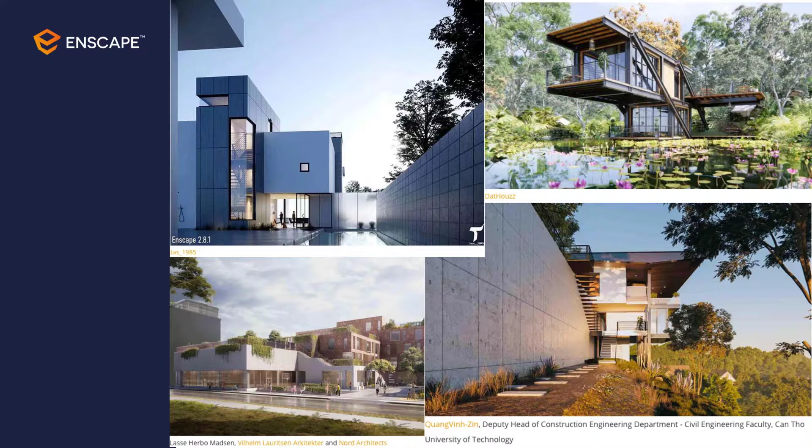In today's process, it's kind of fractured. At some point in a project, we branch design and create a new, separate visualization model that's really disconnected. Then we use this visualization model to answer questions and collect feedback, and we have to manually coordinate what we learn back into our design process. Then, of course, we restart the cycle at the next project milestone. But why?

Why does rendering and visualization have to be separate from design? Why can't it be integrated into our design process?

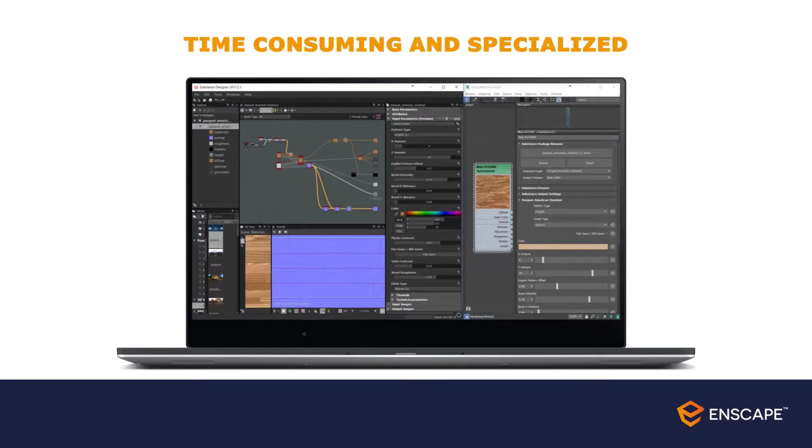Traditionally, rendering technology has just been very difficult. With traditional rendering technology, it can take hours and sometimes even days to get out a high quality visualization. Correctly configuring textures, materials, and lighting to achieve a realistic look is difficult and demands specialized know-how, and even then it can require a lot of trial and error. As a result, in many firms, rendering and visualization is relegated to specialists using specialty visualization software, or in some cases it's completely subbed out.

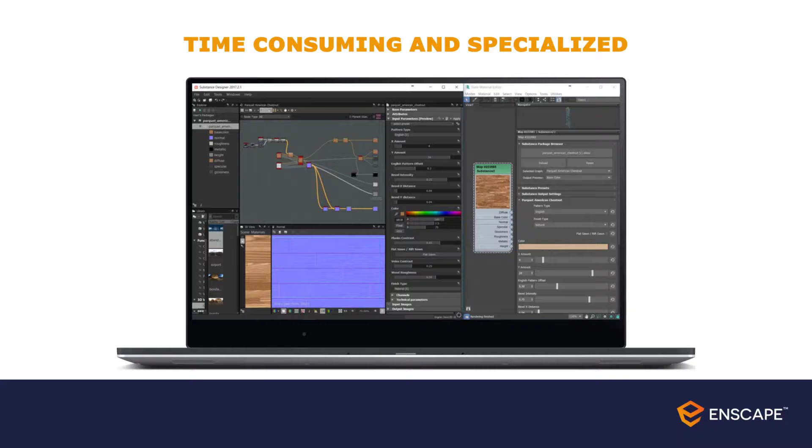Real-time 3D is different. It's this next generation of visualization technology. What we're doing is leveraging new advances in graphics technology and hardware technology. It's fundamentally the same rendering technology that you'll find in today's high-end video games. And while the results are incredibly impressive, more importantly, the results are instant and very easy to achieve.

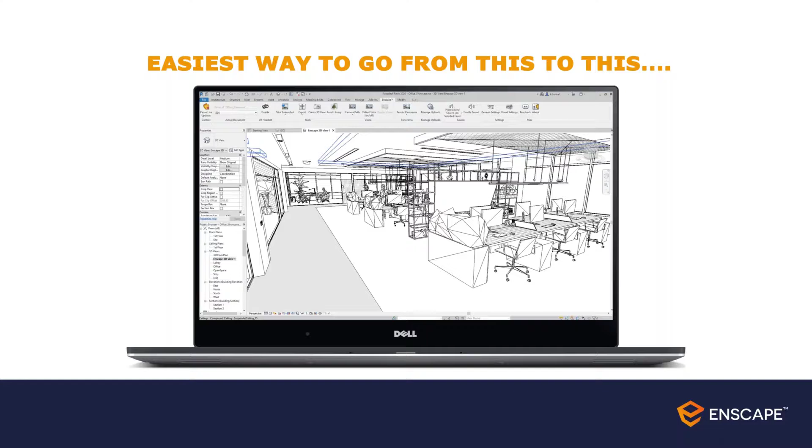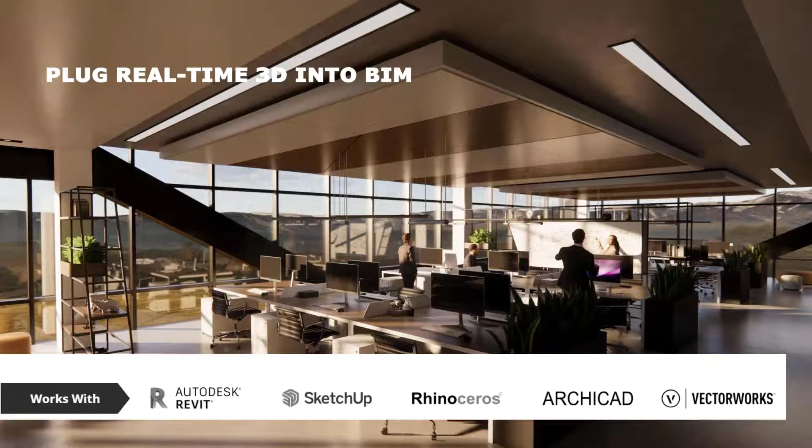It's this kind of speed and simplicity that are the cornerstones to Enscape. Quite simply, Enscape is the easiest way to go from something like this to something like this. For us, this concept of ease of use and speed is not just jargon. These are truths derived from the fact that Enscape is a plugin, not a separate rendering program, as you'll see.

Unlike other rendering programs, you don't have to exchange files or manually sync models. Enscape natively plugs into your favorite modeling program, and it integrates into its interface and into your BIM workflows. In many ways, Enscape is simply just another rendering mode. It's not a standalone program that you need to learn. In fact, if you've ever added a light source or a texture in Revit, you already know how to use Enscape. The results are just a little easier and faster and way more impressive.

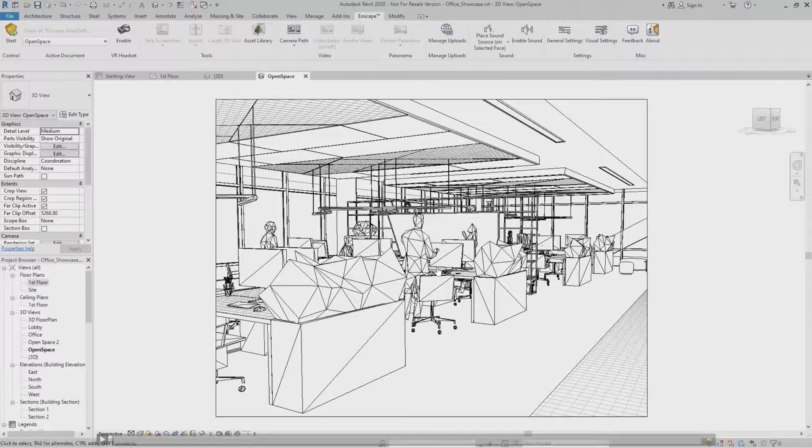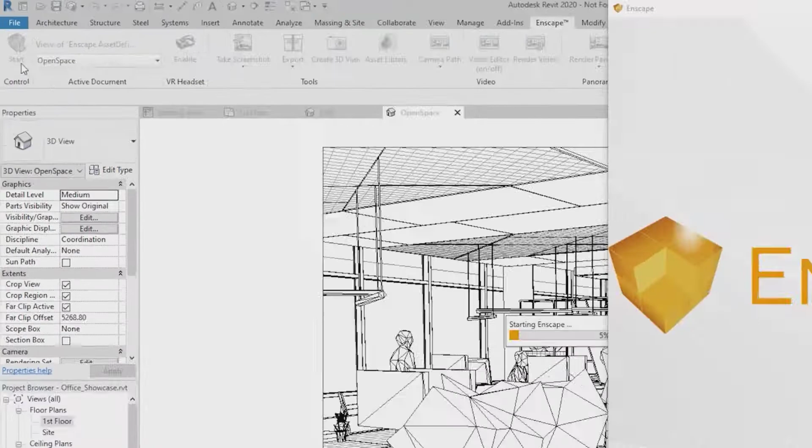The animation's playing a little slowly, but fundamentally what we're looking at here is after you install Enscape, it installs a ribbon in your Revit interface, and it's completely integrated into the Revit workflow. To start Enscape, you simply click the start button, and then Enscape will launch a new window where you can see your models fully rendered.

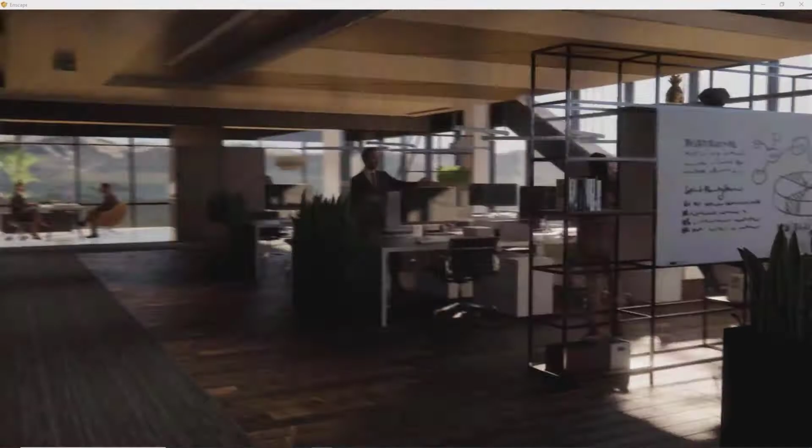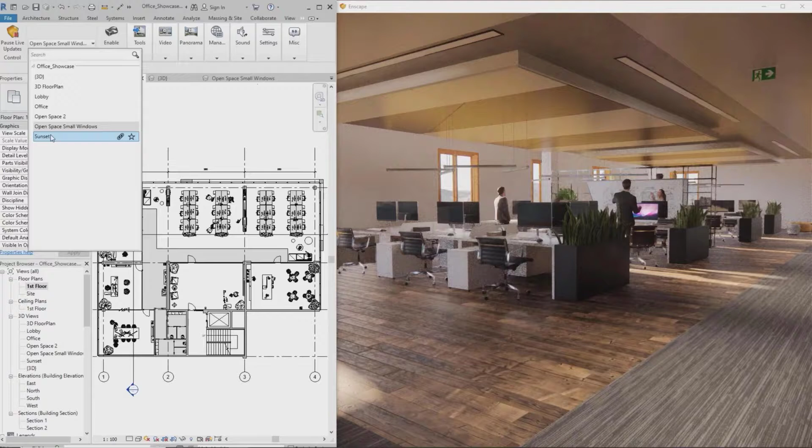Any textures and lights that you've assigned in Revit are automatically picked up in Enscape. Using the W, A, S, and D keys and the mouse, we can begin to immediately explore a project in 3D. To find specific views, you can use your saved 3D views in Enscape to navigate around the model, and your saved views will not only change your view but will also show any visibility settings that you might have saved.

Because Enscape and Revit are integrated, now BIM modeling and visualization can be simultaneous. They don't have to be separate. You don't have to stop design in order to visualize in another software program. Visualization can become part of your Revit workflow, your design workflow. In fact, in many offices, you'll find Revit open on one monitor and Enscape open on the other, allowing the architect to work back and forth between the visualization and the BIM model, and to instantly see how their design decisions will affect a building's architecture and construction, helping them get to decision points faster.

The results are amazing. With Enscape, we can create still renderings in 4K resolution, generate 360 panos, create path animations—and I'll drop a link into the chat with an example of a path animation—and also, with one click, we can take your Revit models and experience them in virtual reality.

So this is sort of a plan of that space, and this is an MRI suite. They had some stuff there, either a real MRI or a mock-up. You can see in the top left we had a full VR station set up, so if somebody wanted to immerse themselves fully in the actual 3D model, they could do that.

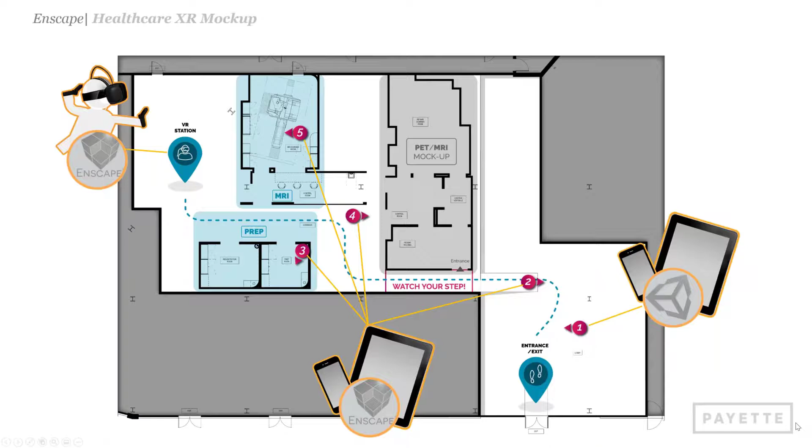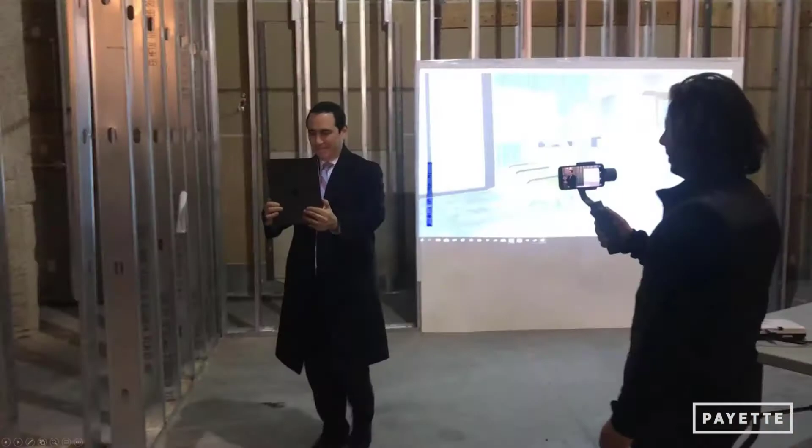The numbers are indicating different QR codes that were spread around the space. If you click to the next slide, you'll see a video showing people using the QR codes with their iPads and phones. This was a wildly successful meeting. The biggest surprise to me was on multiple occasions seeing groups of 2 or 3 people walking around getting excited anytime they'd bump into a QR code and scan it to see what was happening.

What you saw there was the gentleman actually had a live model. I believe we used Unity to create that one, where you just scanned the QR code and it would load the full model into the iPad, and you could walk around the space and see live what the actual rendering would look like. But everything else was Enscape panos, and that's an Enscape VR session.

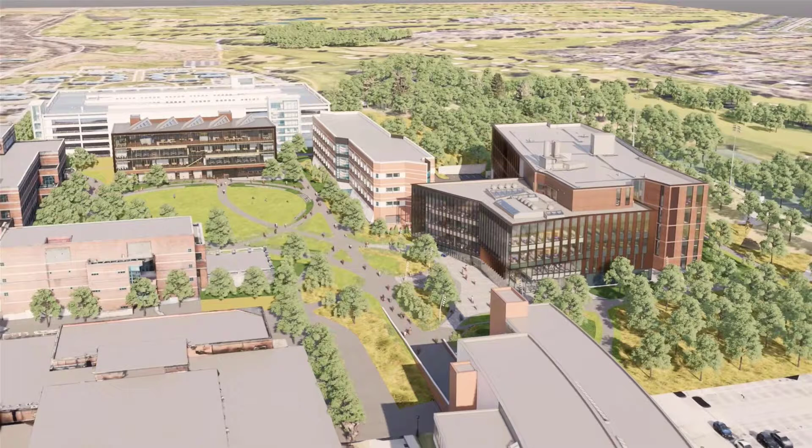This is a project we designed for a large state school, consisting of 2 buildings. I will name them Building 1 and Building 2 because the client wants to keep that information confidential for now. The L-shaped building on the right is Building 1. The rectangular one with triangular skylights facing the central quad is Building 2. The project also includes the redesign of the landscape of the quad in between the buildings.

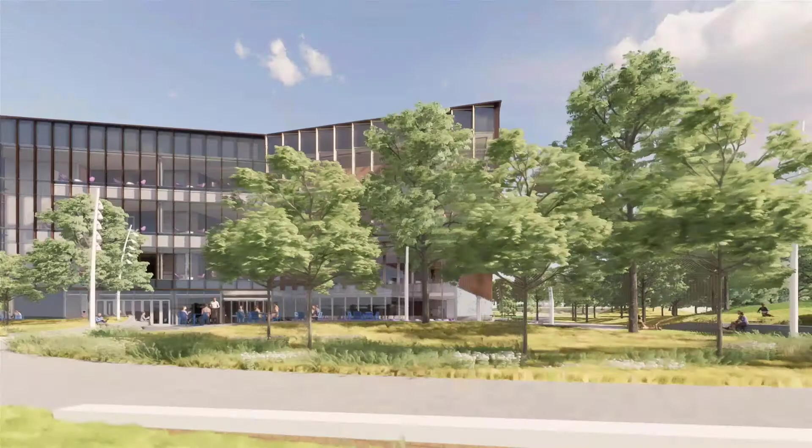I will show short clips trimmed from the original video, like this one, to keep the presentation short. I also had to compress the videos to avoid any technical difficulties during the presentation, so the original video quality is much better than this. Enscape has much better results.

We structured the animation with 3 different primary sequences: the exterior shots of the buildings, and the interior shots of Building 1 and Building 2. You will see some short video clips from each sequence in the following slides.

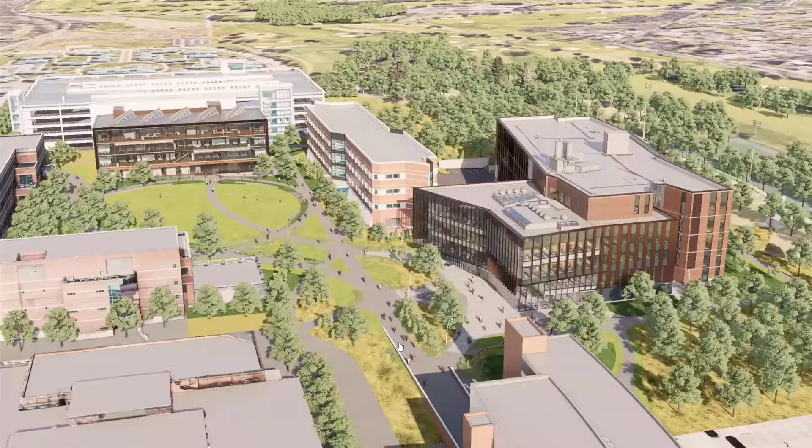As you can see in this slide, our animation starts with an aerial shot composed of our building models, context buildings scanned by a drone and imported as a textured mesh, and Enscape assets like trees and people. Next slide.

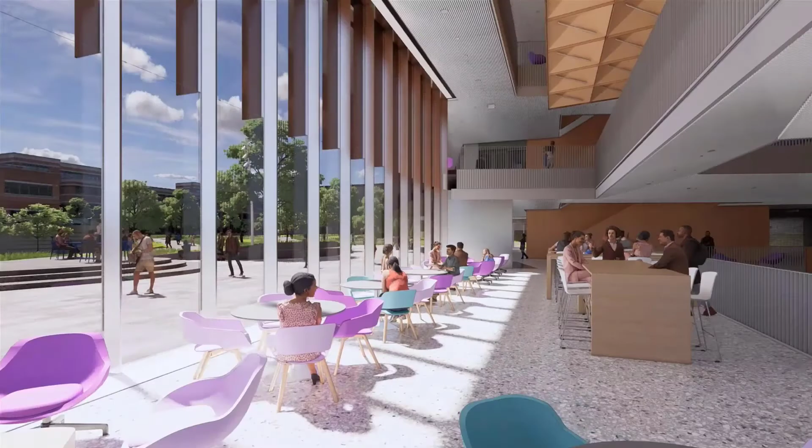For interior shots, we do the opposite. We usually prefer to add more people to make it look more lifelike, and thanks to Enscape's diverse asset library, it is effortless to do this.

Another critical detail in this clip is that we always use different lighting settings for the interior shots, because naturally interior spaces tend to be darker than exterior shots, so it's important to adjust that.

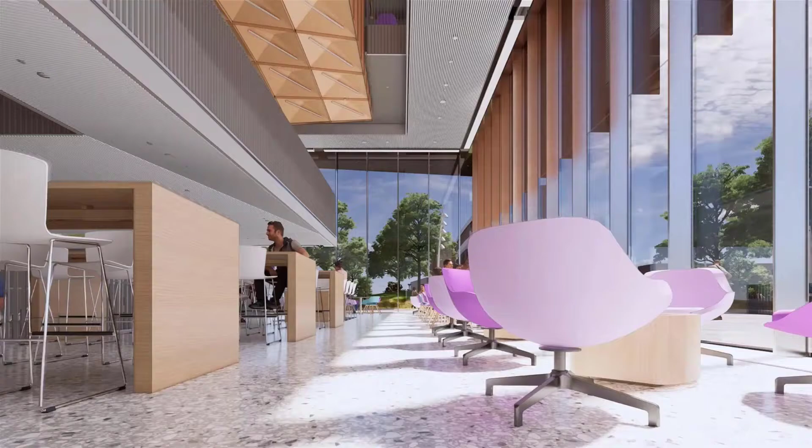We also adjust the material settings of glass for different interior views. For instance, we reduce the reflectivity of the glass in this view to show the landscape around the building and create continuity between interior and exterior spaces.

There are also some other tricks we learned by experimenting. For example, if we think an interior space is still dark even after changing the visual settings, instead of using artificial lights to fix that issue, we sometimes apply a material to the ceiling that has a very small percentage of emissivity, which slightly increases the overall brightness in the space.

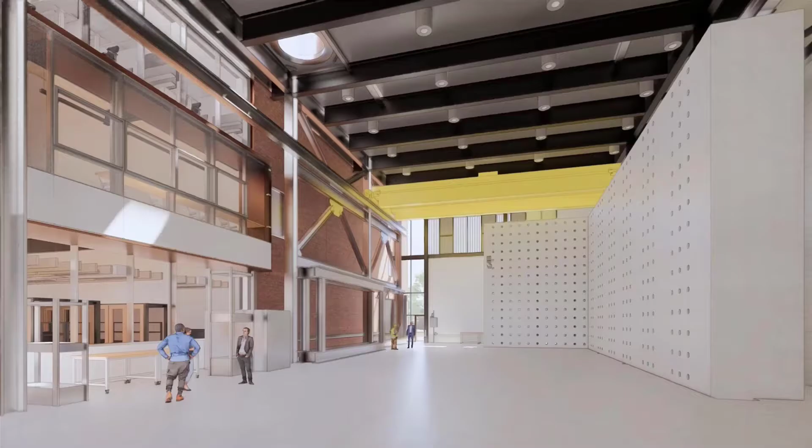This is the high bay space of Building 2, designed to serve as a structures and materials laboratory for academic research. As you can see, there are so many different architectural elements like yellow cranes, perforated concrete walls, and exposed steel structures. For spaces like this, it is very important to pick the perfect view angle to show different architectural elements at the same time.

For the lighting of the space, we took advantage of the building's design and used skylights to create a sunbeam effect on the windows. In a traditional rendering engine, it actually takes more time and experience to test this kind of specific effect, but with Enscape, it is very easy to change the sun angle and see its impact in real time.

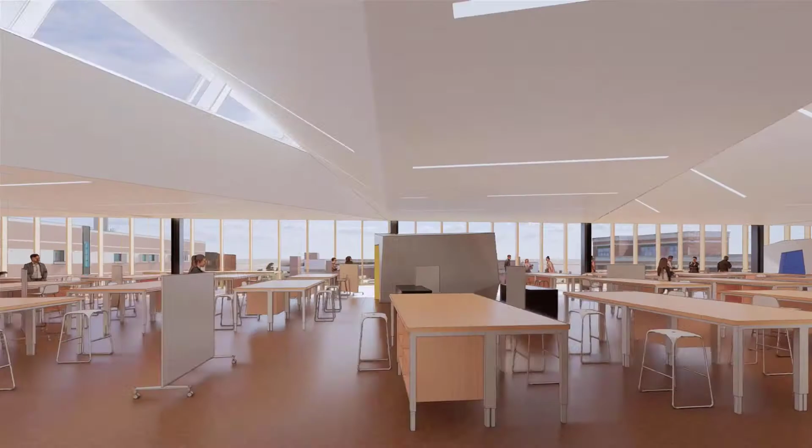Another helpful feature of Enscape is that it allows you to choose a two-point perspective camera. We usually prefer using two-point perspective for interior shots because for spaces like this one, with so many vertical elements like mullions, table legs, and marker boards, it is even more important to use a two-point perspective to perceive the space correctly.

It also facilitates a more accurate understanding of non-orthogonal objects, like these study pods with colored interiors or the ceiling with triangular skylight openings.

As you saw at the beginning of the video, these two engineering buildings at the center and the orange bridge connecting them with the rest of the campus are designed for Northeastern University in Boston. The contextual information was crucial for this project, so the project team asked us to create an aerial animation like the previous project.

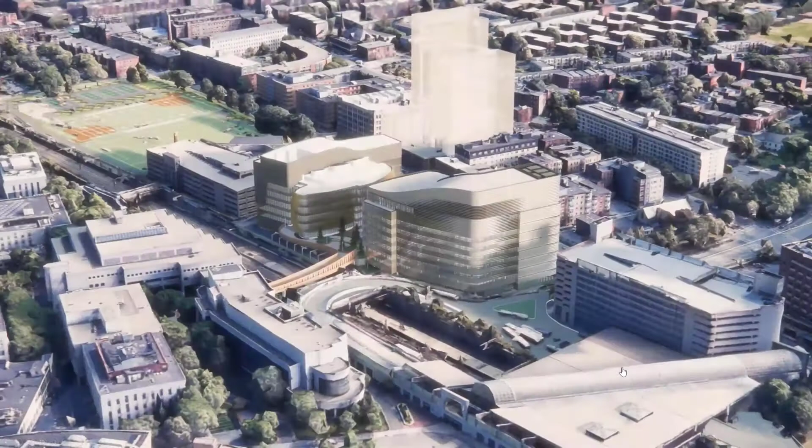We used a large context model with textures. Because this model has a very desaturated color palette and the project team asked for a specific atmosphere, we used an HDRI image to create this particular lighting and look. Enscape also allows you to use HDRI images to create a more specific lighting effect.

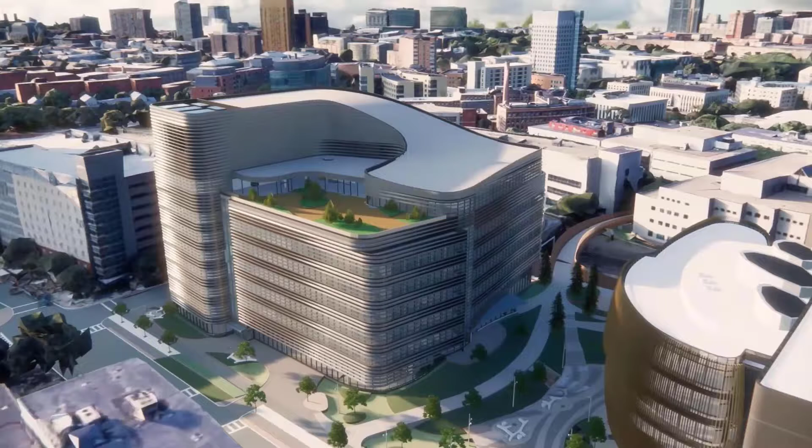Compared to the previous examples I showed, we created this animation using a single animation path that starts from a higher location and slowly spirals down, moving closer to the building.

I couldn't show the entire animation because of the limited time, but I think this short clip gives an idea about the path we used.

When we work on post-processing in After Effects or similar software, we sometimes add photorealistic renderings to transition between different views.

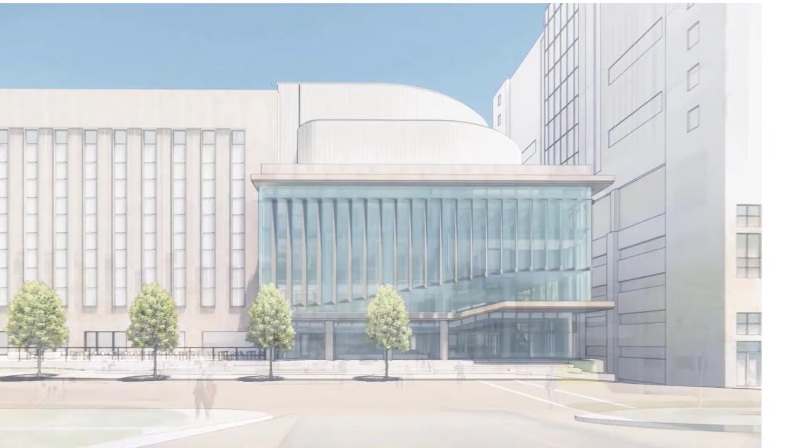This project that we designed for the University of Pittsburgh is a better example of this technique I mentioned, because we tried to mesh the last frame of the animation and the rendering more precisely.

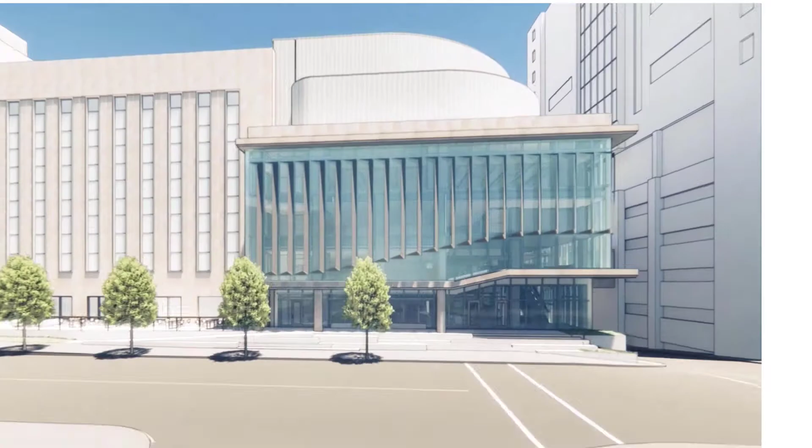It is also possible to match them perfectly, but it requires more effort, especially if you did not plan to use this technique at the beginning. Later, it can be challenging to match the camera parameters between different software.

When we use high-end renderings as transitions between different Enscape shots, we usually prefer to create a more cartoony style using Enscape settings. This technique allows us to create a contrast between the still images and the animation, making it more interesting for the viewers.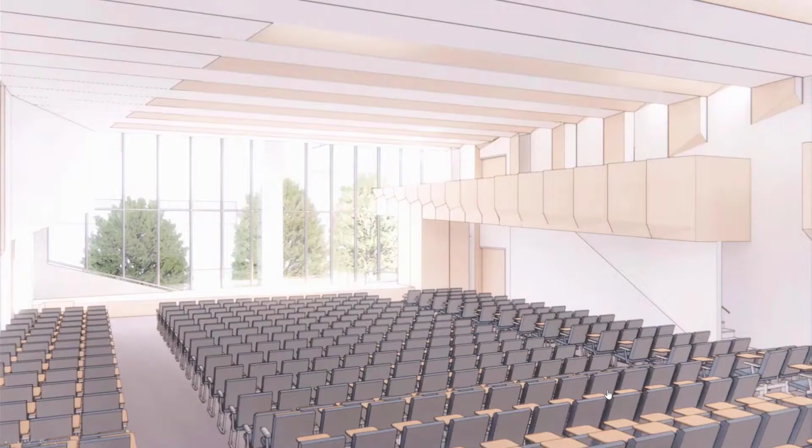To achieve that cartoony look, we use very simple materials and textures, eliminate unnecessary details in the model, and increase the thickness of the outlines. Doing this also helps the viewer better understand the geometry and the boundary of the images.

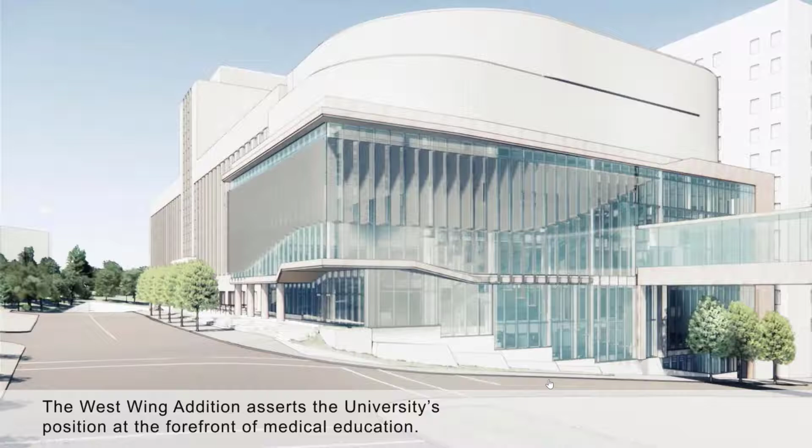And finally, we usually finish our animations with a camera shot that is moving away from the building. These final shots are generally the ones that are remembered most by the viewer, so for the last shots we try to select the most exciting view of the building that tells the most about the design.

In parallel, we also focus a considerable amount of our efforts on the photorealistic rendering that we show in the last frame of the animation. So that's a summary of our overall workflow with Enscape within our design visualization group at Payette. Now I will pass the time to Stacy to talk about her experience in her design team.

Thank you. Thank you, Hassan. Hi everyone, my name is Stacy Krieg.

I'm an architect at Payette, and I am here to talk with you about Enscape workflow, specifically as an architect and a Revit user. In our office we use different modeling softwares, as David was explaining, but we primarily use Revit for our documentation within architecture. So by schematic design we have a Revit model going, and our use of Enscape really starts there, if not earlier in the design process.

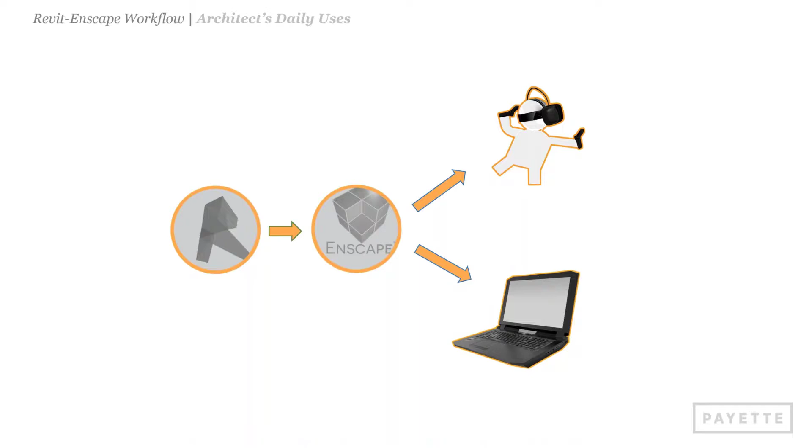So we start using Enscape early on, and it's really been a great tool for us with our clients and within the teams ourselves. The two means of visualization interface that we use as architects are generally the VR headset and our computers.

With the headset, I would say probably our top three uses have been for client walkthroughs, similar to the way David had shown you earlier with that animation; also individual walkthroughs, with an individual architect or designer going over to the VR station and using the headset themselves to walk around; and also internal team walkthroughs.

We use Enscape and Revit to export walkthroughs for our client, for internal team walkthroughs, to export renders for clients, to export renders for our internal discussions, and for individual walkthroughs or fly-throughs.

So just to talk briefly about the headset and the way I've been using it within our office, there are generally three different modes: the individual walkthrough, the team walkthrough, and the client walkthrough.

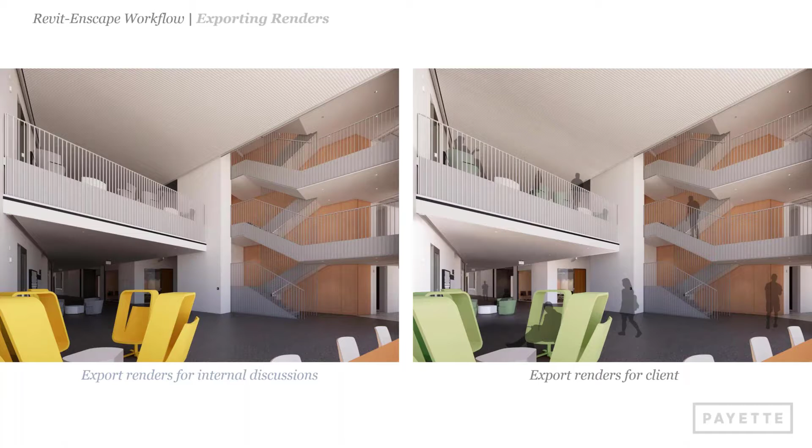Also, we have used Enscape for export renders for our clients. So that might just mean we'll bring it into Photoshop a bit and go from there. But it really exports quality renders, which our clients have found very helpful in understanding the space as we present it to them.

Another way that I've used it, sometimes internally but also with the client, is that in architecture you'll have to work through different design options and studies to understand and discuss which are the best options for the project and for the team.

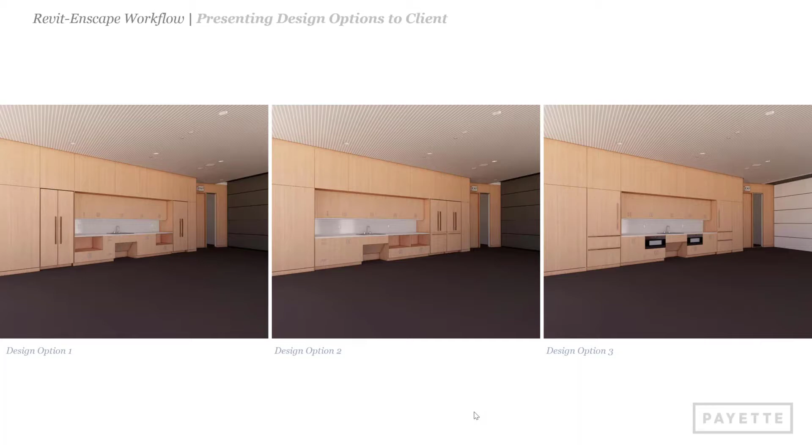This is just an example of a simple kitchenette, but we did a study looking at 3 different layouts with different refrigerator types. This was a really great way to export these images, get that out to the team, and get quick feedback. It's part of that iterative feedback loop, and it's been a really helpful tool on the architecture side.

As Daniel was explaining, you can also walk through Enscape, and you've seen that with the animations from Hassan as well. This has been an extremely helpful tool on the architecture side to sometimes leave Enscape open. I can walk around the model and see things that I might miss if I'm only looking at a floor plan or an RCP. There's always that interstitial zone between those, and there are always details you might miss when visualizing the space and working through it.

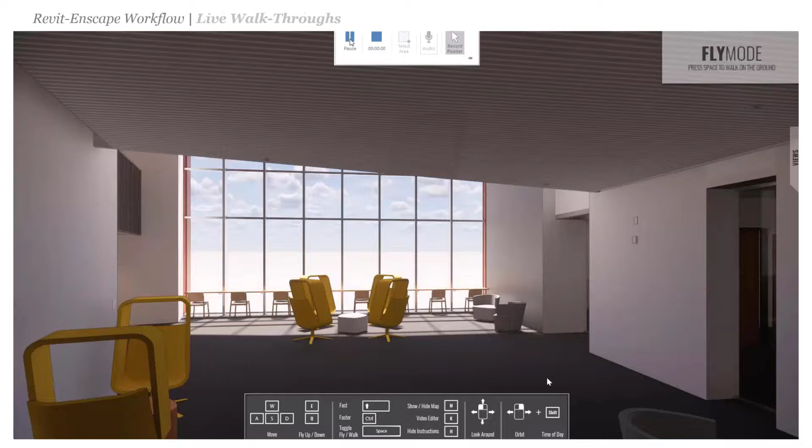This is an animation, we can play this pretty quickly. I think Daniel showed probably a better example of this, but this was just in one of our models, starting to open up Enscape. This is me doing it very quickly, trying to move around the space, and it might be a little slow, but trying to move around and check on things as I'm going.

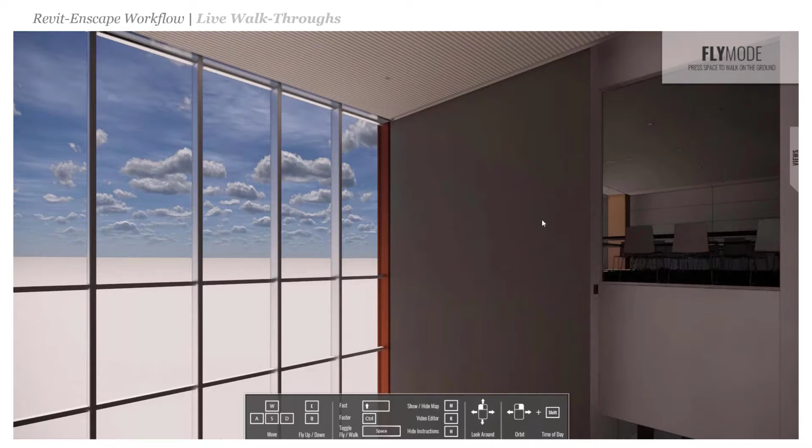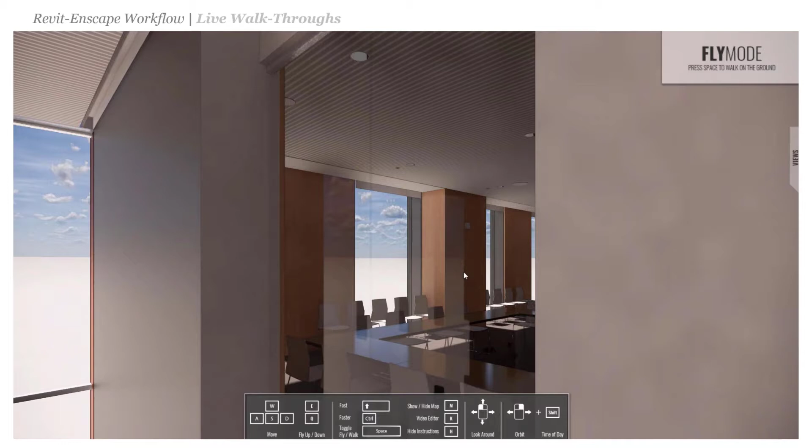This is an example of one way that we use it. This is me seated at my computer, probably not the most eloquent movements, but you can see this as a tool that's helpful for us, not necessarily always as a presentation grade image or animation. And I think that's about it, we can skip the rest of that. Thank you.

Another way that we've used it, from our computers and not the VR headset, is to record walkthroughs for a client.

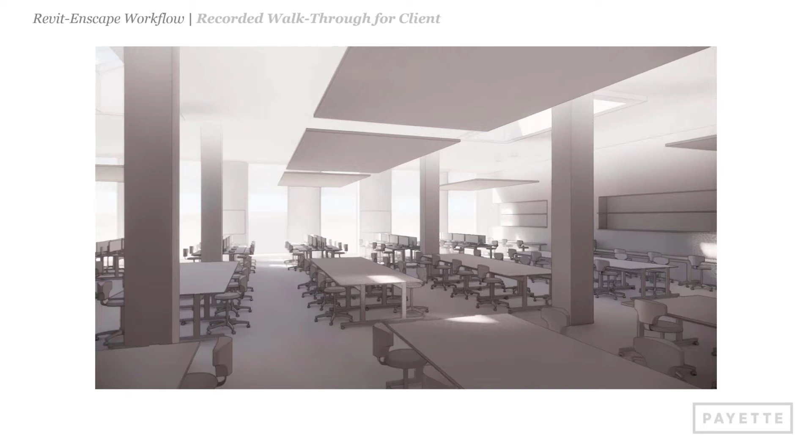This animation in particular is from early on in our design phase for a project. This is a single studio space, and our client was out of state, so we wanted to send them an update of the space to let them know, kind of refresh them on the past meeting minutes and notes, say this is where the space is right now, and pull together all of the feedback we had received from them.

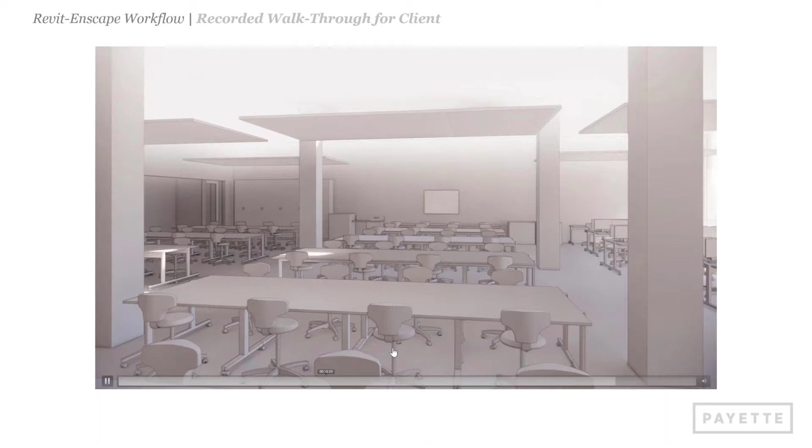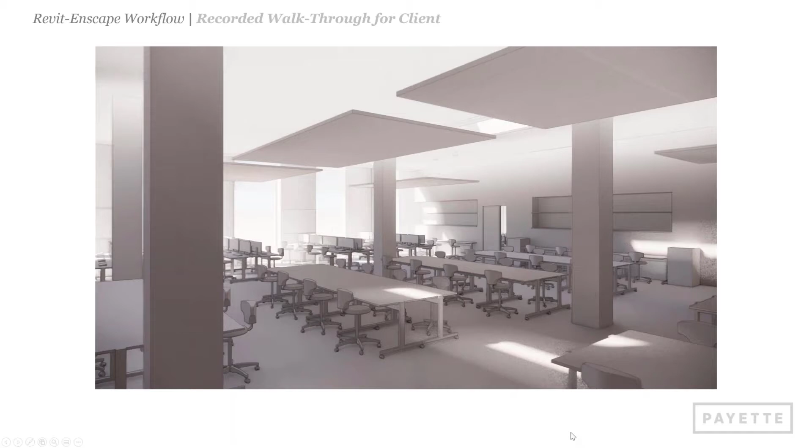This was a great tool for us to update the client, especially since often there isn't just one still shot that can really describe the whole space for you. So we did an animation and recorded that as a walkthrough for this particular project.

So for the next few slides, I'm just going to go through a few settings that we've used. As we were saying earlier, settings in Enscape are pretty great. They're very user-friendly. I think you probably need very minimal to zero background and knowledge of rendering. As architects, most of the time we do have that background, especially someone who studied photography, or honestly, just who has used Instagram. There are a lot of lighting settings and almost filter settings that you can customize throughout Enscape, so I'll go through a couple of those with you guys.

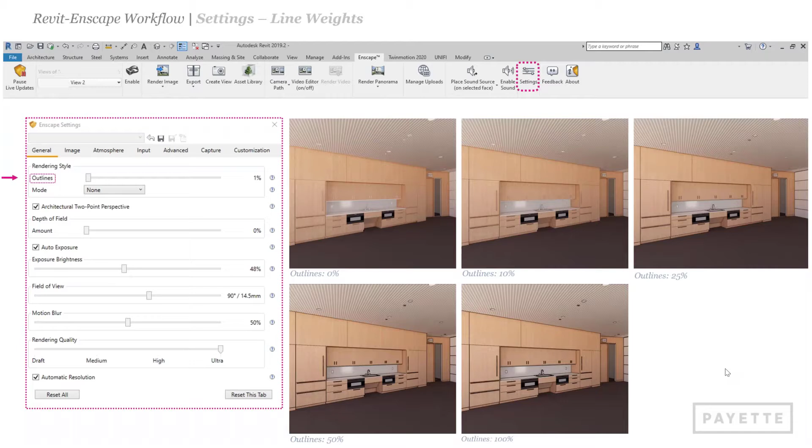Another setting I've enjoyed using is just the mode of the image. You'll see those image examples to the right, your typical normal view of how you'd see the project in real life, versus a white background or white mode, polystyrol, or light view. This has been really helpful, especially when we were trying to portray a project as a little less developed and didn't want to use as many details or show materiality. We were earlier in our design process, more so schematic design, and wanted to focus more on the forms and less on the materiality. Just a couple of clicks and we were able to do that within Enscape, so that was really helpful for us.

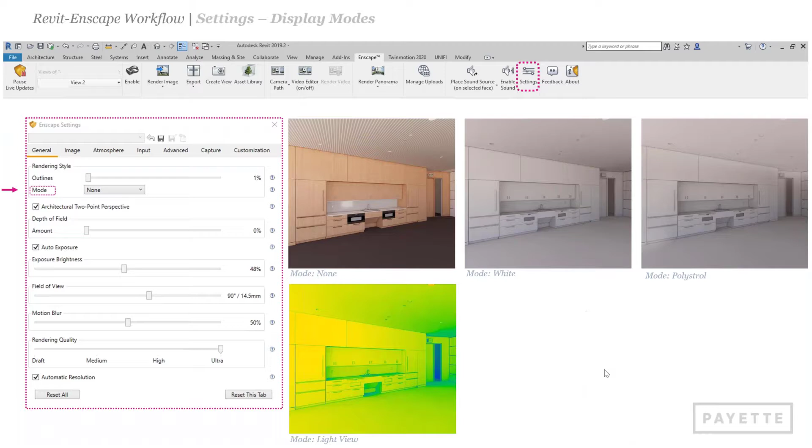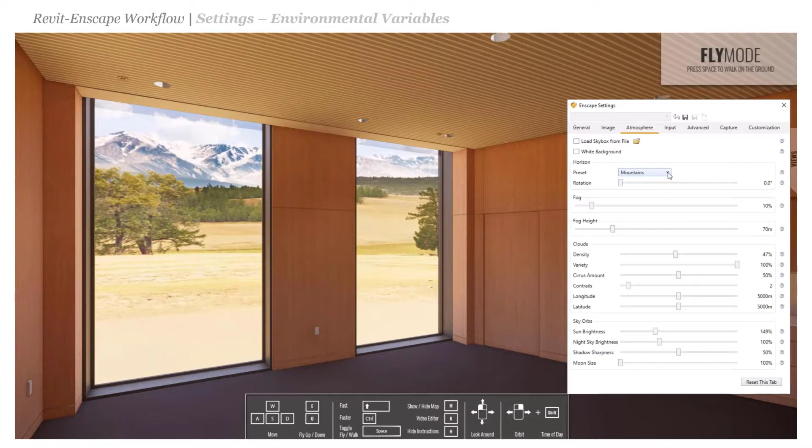And if we go to the last one, this is an animation, essentially taking a quick look at a couple of the environmental variables. This is just inside a building looking out. You can use different preset backgrounds, or upload your own background. And of course, there are also the different environmental settings, clouds, sunlight - you can customize all of that, which is really great within Revit and Enscape.

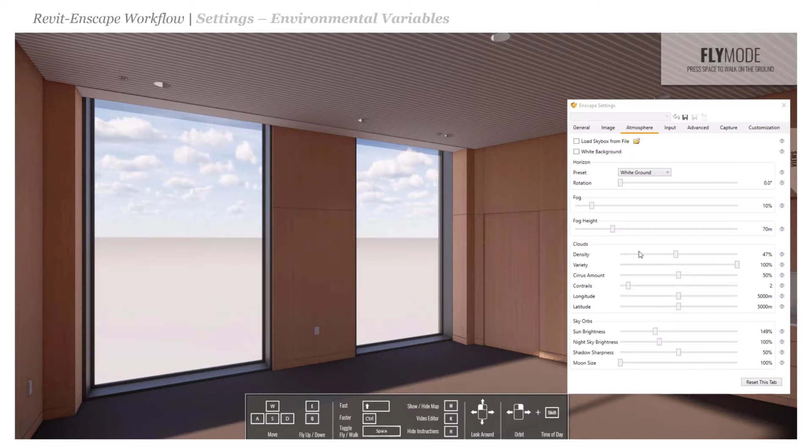This next part is a little slow, but this is me panning through the different time of day, which you can control as well, which is great. So you can get a better sense of orientation on a site, which has been really helpful, especially trying to understand Eastern and Western spaces and how they'd be affected with glazing throughout. This will take us all the way out to nighttime, where the sun is down, and you'll see the lights start to appear a bit more too, which is great as well. The lighting of your Revit lighting is built in and will reflect in the Enscape renders. And I think that's it for me.

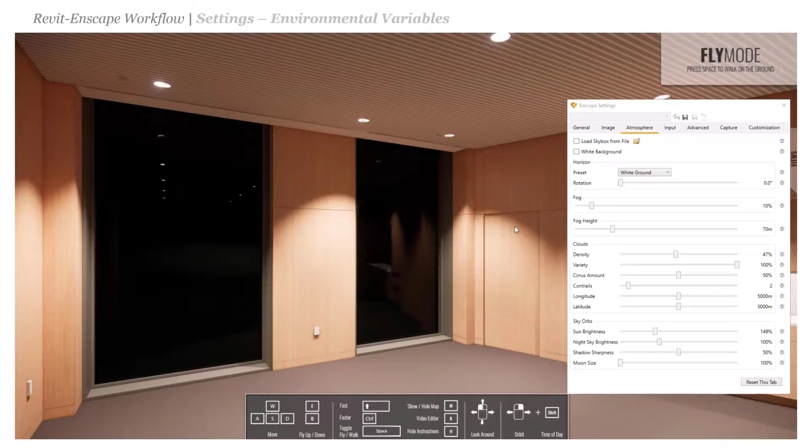For it to take the place of something - and I don't even look at it as taking the place - but for us to utilize it with the max work we're doing and the V-Ray work we're doing. My first comment, which I think I even wrote on their forums, was I just wasn't a fan yet of the way they have their cameras set up and that kind of thing. But I've actually started testing out Vantage already.

Sounds good, thanks. Hassan, do you have something to add to this, or are you ready for the next question? For real-time rendering engines, my experience is limited to Enscape, but I also use traditional rendering engines like V-Ray and KeyShot, that kind of thing. So far, Enscape is the only example of real-time rendering for me.

And Dan, do you want to address that, or are you good? I have not experienced it firsthand, so I know some differences from a technology point of view, but I think every software has its advantages and disadvantages. As Stacy showed in today's presentation, I think the advantage of Enscape is the integration and how easy it is to get quality results.

And then a follow-up question: do you encounter any apprehension? You showed how you presented this to your client - what's been the experience? Are they prone to using VR, or do they want to stay away? Maybe a combination of both. Do you have any anecdotes from clients' experience?